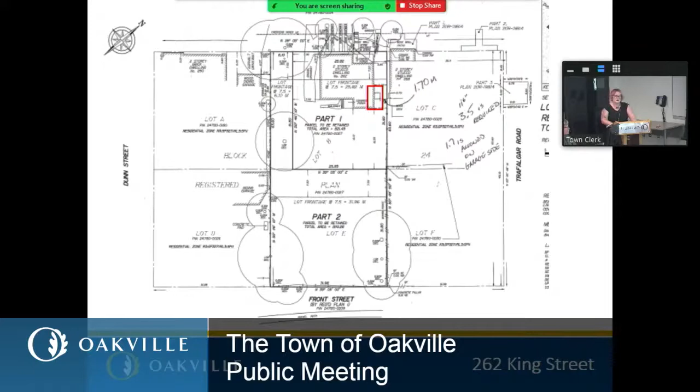Here we've got a site plan of the proposal. The red square is being added by staff just to highlight that little area where the proposed addition is to be located. It is approximately 6 feet by 6 feet, a relatively small addition that will only contain the elevator shaft. There's no additional living space proposed.

On the drawings here, again, highlighted in the red rectangle is the proposed addition itself. It protrudes slightly from the east elevation of the house, but cladding is proposed to be stucco and false half timbering to match the existing coach house building, with a cedar shake roof.

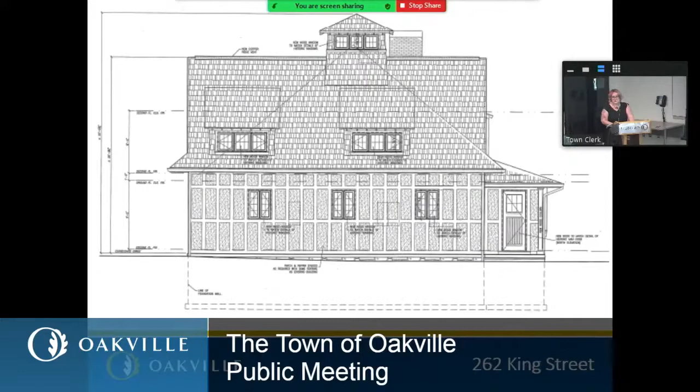In addition to the elevation photos of the house that I showed you earlier, I included some Google Street View images. These are included in the application package, and they're taken from, I believe, 2018 and 2020 — those were the Google dates.

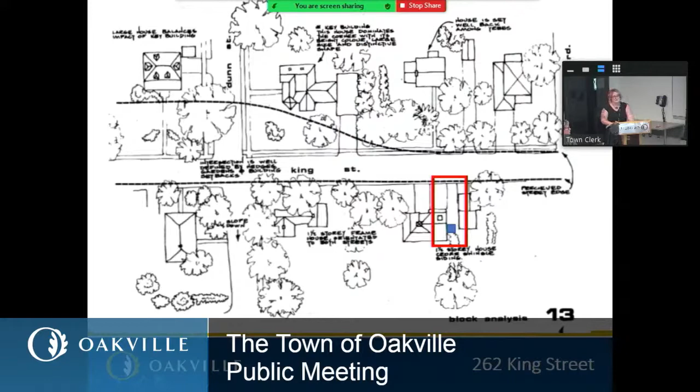As noted in the staff report, there was a minor variance required for this project: a reduction of the interior side yard setback to 1.70 meters, whereas the zoning bylaw requires a minimum of 2.4 meters. This was approved by the Committee of Adjustment at their meeting of July 19th, 2022.

In the staff evaluation, we've looked at the requirements included from the Old Oakville Heritage Conservation District Plan. In general, staff find that the addition, with its location at the side of the building, back from the front plane of the elevation, being lower in height, and with traditional design materials, does not have a significant impact on the character of the Heritage Conservation District or of the historic house itself.

In regards to the Block 13 analysis, the proposed addition does not impact the identified view lines that are of significance, and it maintains the intimate character of the streetscape at this end of the block and the vegetation. Therefore, the staff recommendation is for approval, subject to the final details on the cladding materials coming to staff before their installation, and that this heritage permit expire 2 years from the date of final approval.

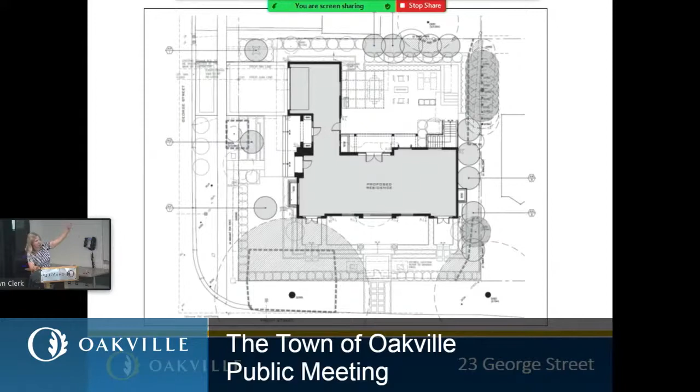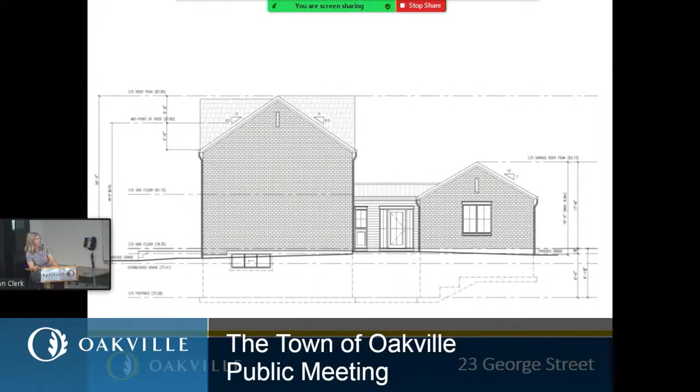This is the easterly view. So again, on the right, you are looking at the back of the garage and the back of the breezeway. And then this would be the east elevation of the two-story portion of the house. And then this is looking from the north. So you have the garage on the right and the rest of the two-story building behind, with a bit of a covered walkway towards rear doors.

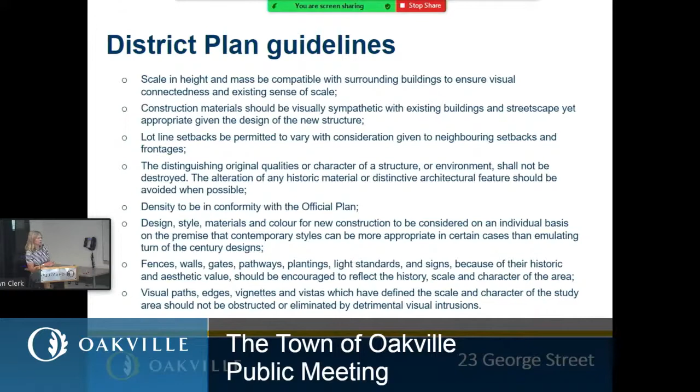So I've included the district plan guidelines here. They're also in your package. I don't think I need to go through all of them unless anyone wants me to. I will give a bit more detail in terms of the block analysis, but these are the general guidelines in terms of the design and materials that would be accepted and supported for a new house in the Heritage District.

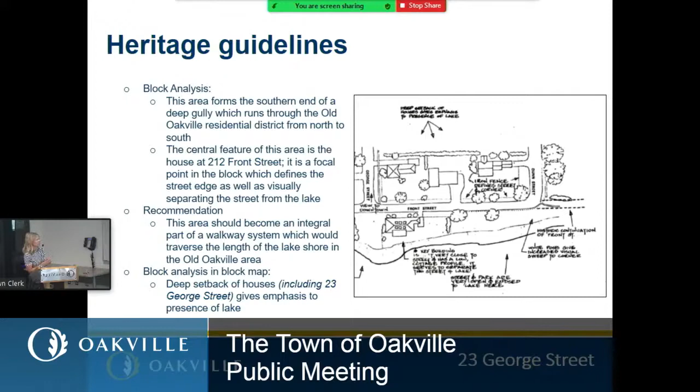And that's about it to highlight there. So again, the staff recommendation today is just that the application be received. We're happy to take any comments you have on the application as you see it, and those will be incorporated into staff's comments for the site plan application process. Happy to answer any questions.

Okay, super. Yes, I'm lit up. At some stage, they're going to have to decide where the side yard is and where the front yard is.

I understand because the frontages are equal, you can make a choice. But the way it looks right now from George, you've got an entrance, you've got a door. It could be a side door, but it could be a front door. But when you look at it from Front Street, you've got the two gables and patio sliding doors in the middle. So I guess if it were to come back to Heritage with Front Street being the front entrance, Heritage would be looking for something more like a front door than simply a walkout sliding door. So if it comes back in that format, they would have to have decided where the front door is actually going to be and design it accordingly. That's just a quick off the top from me.

And I was disturbed that there are no windows at all in that east elevation. It's just a huge blank wall.

Variances at this stage in the game, surely you can live within 23 or 22 or 21, but that can be dealt with later. So that's kind of just a couple of quick thoughts from me, maybe to get people thinking about it. But remember, this part of the process is to get ideas like that, and some of them will go into that hopper, and some of them will be contradictory, and we know that, and we've seen that happen. But that's okay, because it's all input, and it's all good input, and it will be used, and some of those inconsistencies, perhaps, will be resolved during the planning process before it comes back here as a heritage application.

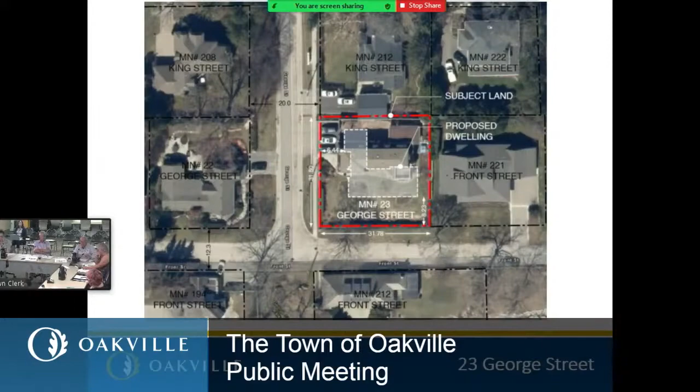Okay, thank you, councillor. Just a wee thought on the fence, though. I know that the town goes through periodic land grabs when it widens the road allowance, and that may have been what's happened here, but it's kind of where it is right now. I'd throw in, if there's some possibility of some kind of easement arrangement, like leave it where it is. Instead of ripping it up and knocking down the stone corners and all that, just leave it where it is and enter into whatever legal easements you might need, with responsibility to maintain being with the homeowner and not with the town. I think that might be helpful, picking up on what was said earlier. Any other? George?